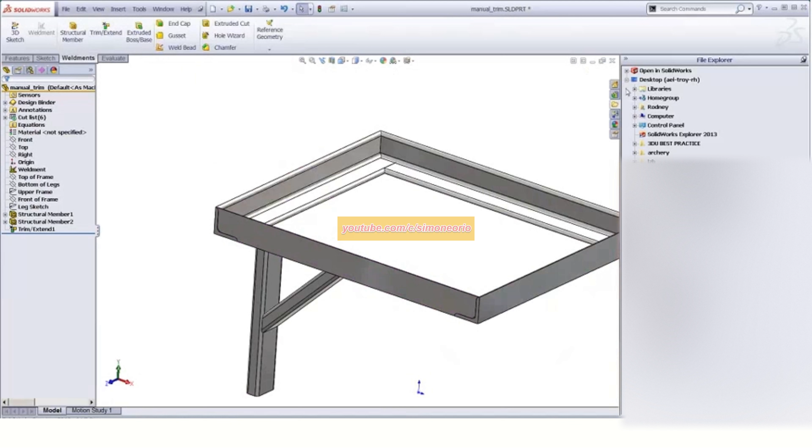Okay, so let me go ahead and close this one. Come back to here. All right, next up here. We've done trimming of weldments, and we're clipping along at a pretty good pace here. So before I get into custom profiles, let's explore some of the other things that we can do here with weldments. Right, so first up, we'll just look at the top here. Okay, end cap.

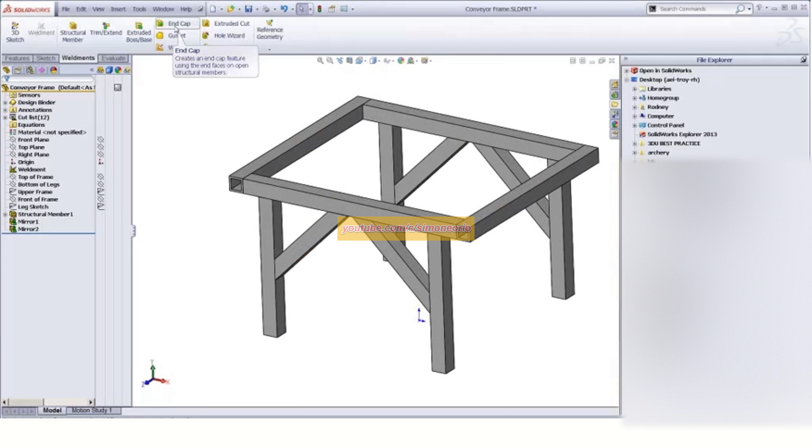Right, this has also been improved again, and I keep saying improved because when I was really heavy into using weldments, was a former job about 6 years ago. I've been at SolidWorks just over 5 years now, and that last job I was using weldments pretty heavy. And there's been changes to the software since then.

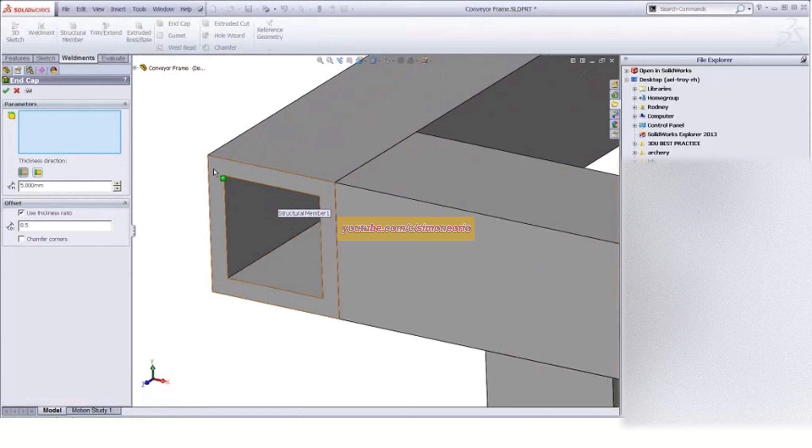Okay, and one of which here is I just pick an end face, okay, and I get a cap on here. Now, how is this size determined? It's technically determined by the outside boundary of my profile, okay, of the part that it's capping. Okay, I can tell it how thick it needs to be. 0.25 inches. I'll make it the same thickness as the material.

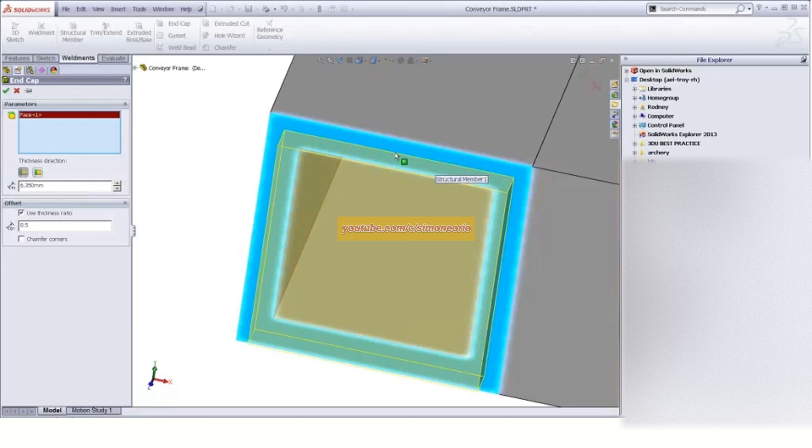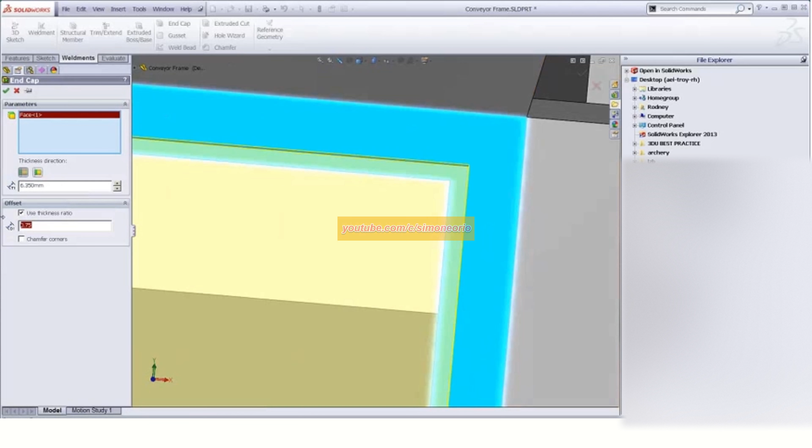Now, the ratio here is, again, in the middle. We're halfway or 50% of that wall thickness. If I change this, say, to 0.75, notice it shrinks down, gives me a little more room for weld, or go the other way around. Again, maybe this is plastic, and I'm going to glue right on the end, okay, with this.

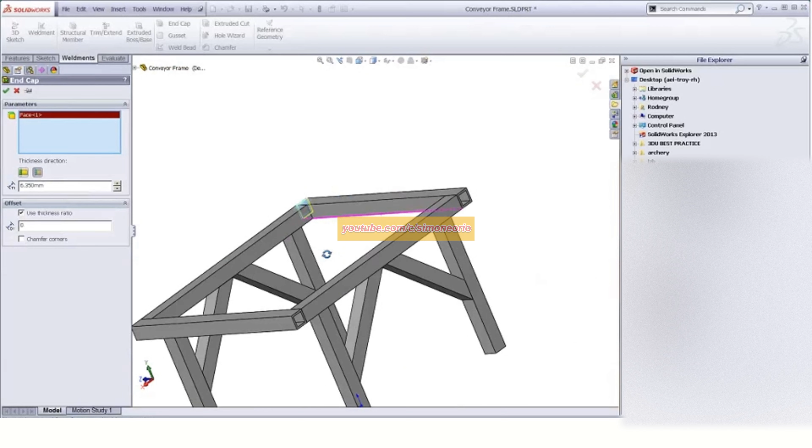Now, as you can see here, it's capping on the outside edge. And what if I want this to be flush? Well, there's an option here to go inward, okay, with that thickness. Okay, so maybe I weld here. Let me change this to, let's do 0.25. Okay, and what it's going to do here is automatically push this inward and basically trim the end.

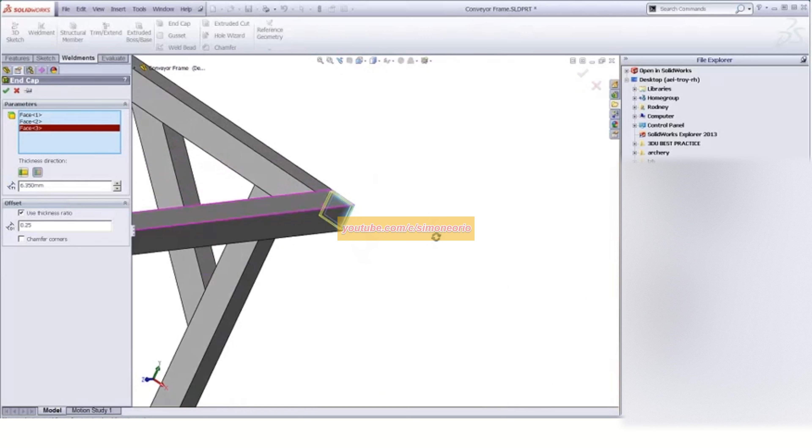Now I can keep going here, add all of these. I'll say OK, and check it out. It trims it back and adds the cap on there, so it's nice and smooth here on the end.

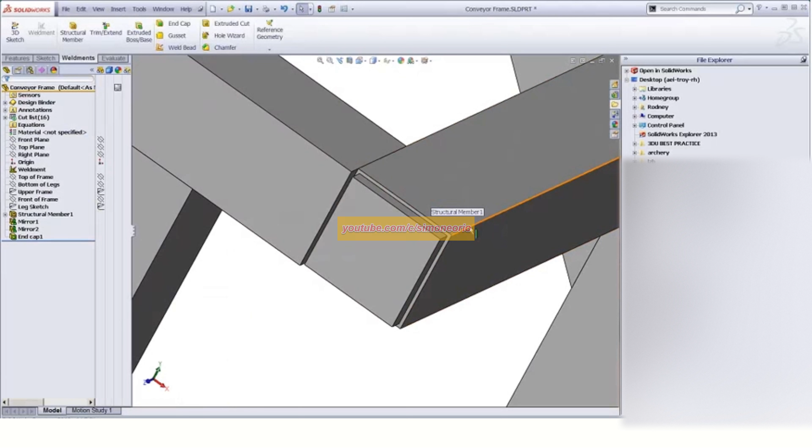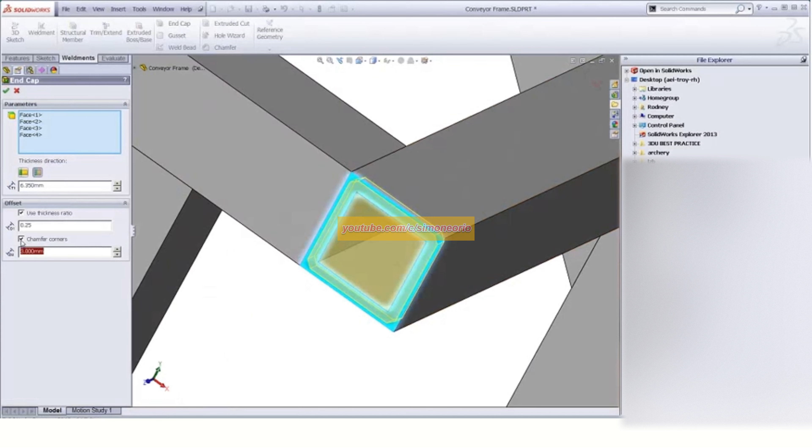Now, if this profile were almost like an aluminum extrusion, if you had one where it was rounded, one of the other options that can happen in end cap when you have that is, as you can see here as well, I can chamfer those corners. Okay, so if it's something like a normal steel profile, when they're thick, there are pretty heavy outer rounded edges to it. So you can chamfer this down if need be. Right, to make it fit if those corners are rounded there.